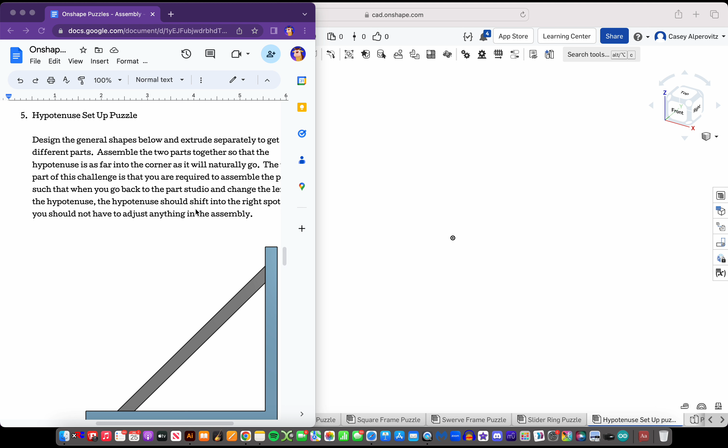So design the general shapes below and extrude separately to get different parts. We have to design this whole thing first, so let's do that. Let's create a new part studio.

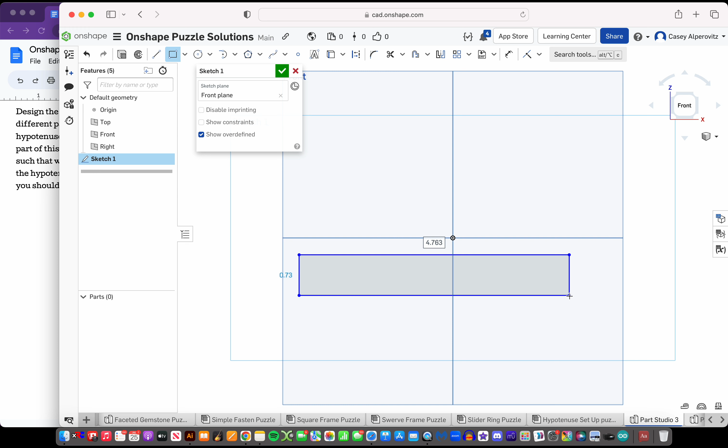And the dimensions don't have to be exact for this. Let's just make a rectangle. Let's make this 1. Let's make this 5 or something - it doesn't really matter. Let's make this 1. Let's make this 25 actually, that way we have more room to work with. Let's do this at 45 degrees.

And this is perpendicular. Let's just make sure these are set to 1 inch apart.

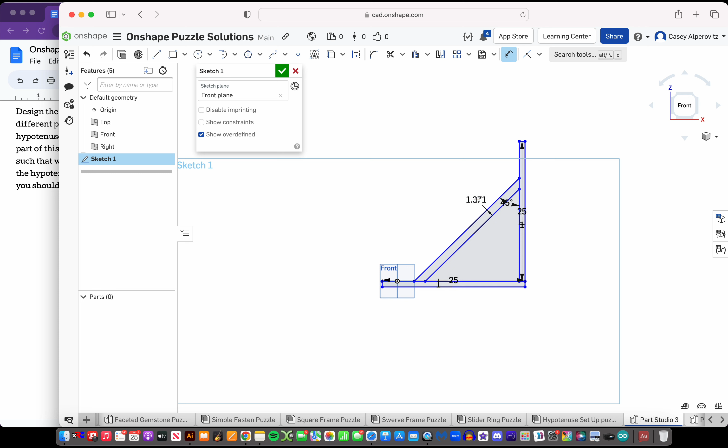Okay, now we need to extrude these parts. And we can't extrude them all at once, because then we wouldn't be able to create separate parts for the hypotenuse, which the directions want us to do. So let's start by extruding this, and then extruding this as a new part.

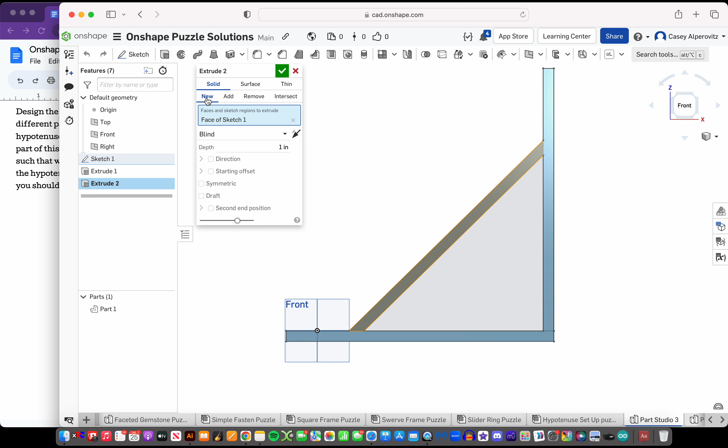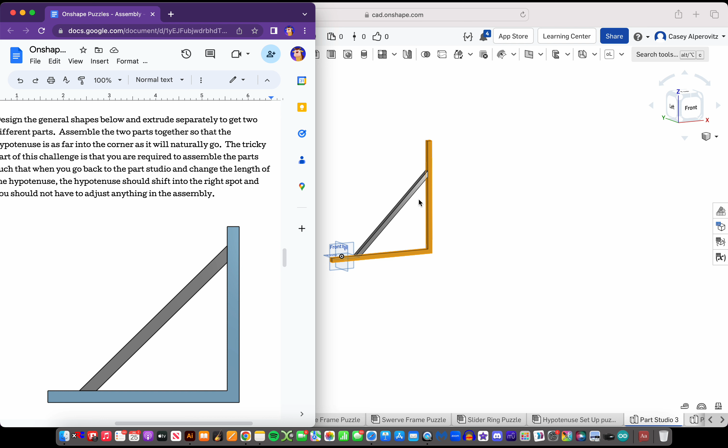Now we have our hypotenuse. Now, assemble the two parts together so that the hypotenuse is as far into the corner as it will naturally go, which it currently is.

The tricky part of this challenge is that you are required to assemble the parts such that when you go back to the part studio and change the length of the hypotenuse, it should shift into the right spot and you should not have to adjust anything in this assembly.

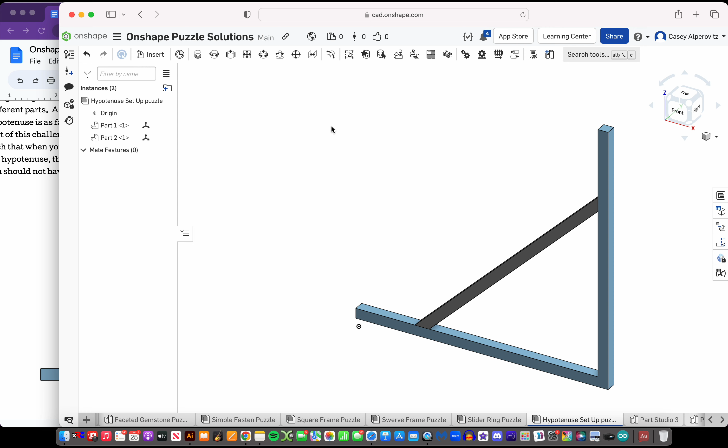So if we weren't going to do that, one thing we could do in the assembly is just group this all together. And yay, now we have it in our right position. But if we were to change something like this, it's still going to work.

But let's say you can't always group in the assembly, because sometimes you're importing like a piece from a different assembly, so you can't always group right away - you have to attach. So let's not do that. I should actually include that in the directions: don't group anything, that is cheating.

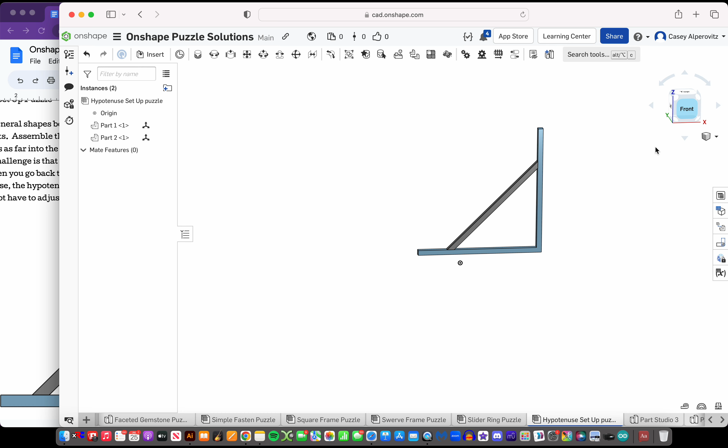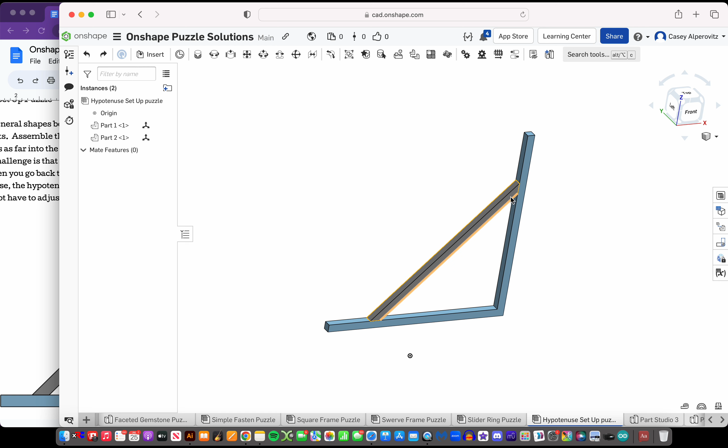Now, what we could do is figure out how high above this is from here, and then offset it by that certain amount. But then the problem with that is if we go back into our part studio and change the length of this, then to get it to go into the right spot, we'd also have to change the amount we offset it by, and doing that each time is a hassle. We want to do it so that no matter how you change it in the future, the part always snaps correctly into place.

So we can use our parallel mate to create some restrictions on this. We select the two planes we want parallel, and then we can go into our limits and constrain them so the angle won't move. That's how it would move.

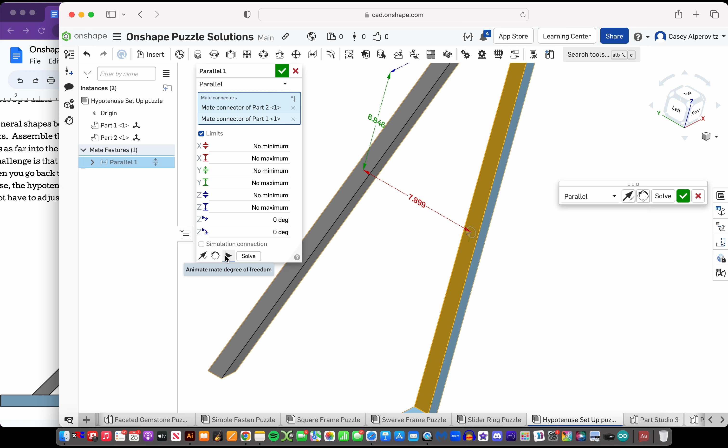Let's see - we never want the x-axis to change, so we don't want this sliding off. And we don't want the z-axis to change. This should be right up against the edge. The y-axis... oh, what did I do? There we go.

This should be able to move up and down now, because no matter how we change the length of this, we should always have it so that it's touching this.

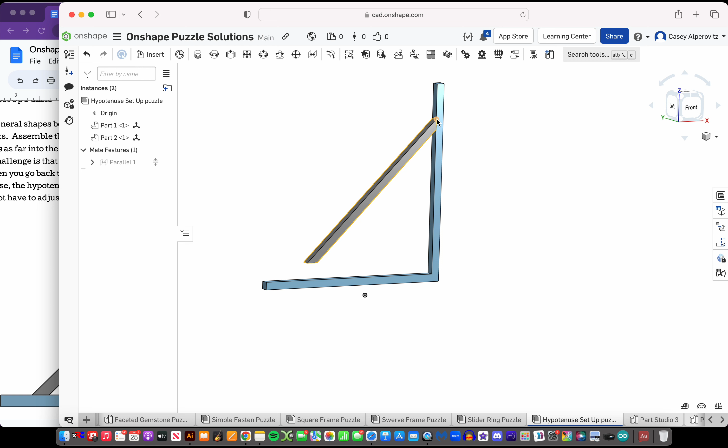Now we just do a parallel mate on the other side, and select check. And here it is in the correct position, but we're going to want to limit it because you could still drag this up since we didn't set any limits on this.

Now, per our constraints on this, we're not going to be able to rotate this, so we don't have to worry about all this. We just want the z-axis to always stay the same here - 0 inches apart. Give it a second to load and calculate.

Yay! Now we have it in the right spot. It's parallel to both of these parts and constrained such that it can't move in and out and it can't move up and down. Now we're in a scenario where if we change this, like let's drag this so it's teensy tiny, it should automatically adjust because the math stays the same.

If we did that with just a simple fasten and an offset amount, it would still be offsetting by the same amount here that it previously was. But when we use the parallel mates, we get it so that no matter what the part studio dimensions are, it will always apply. And that's how you would do the hypotenuse setup puzzle.